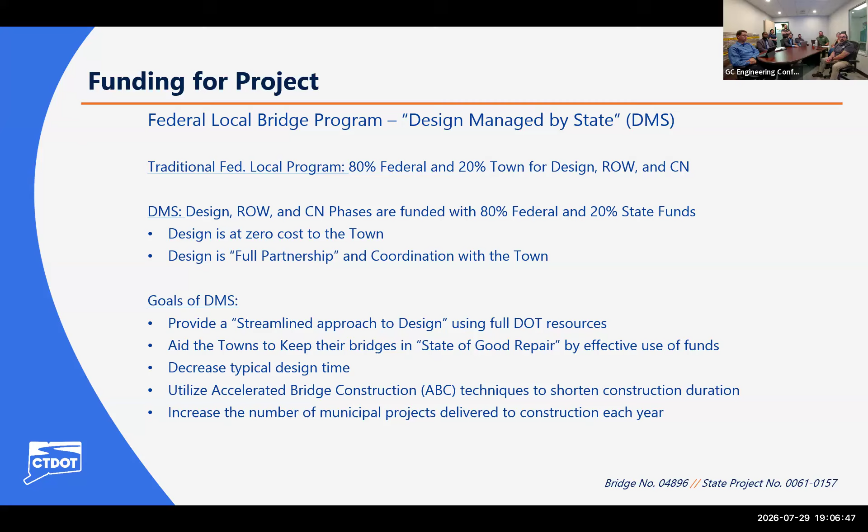Even though the department is undertaking the design on behalf of the town, it is still a full partnership with the town, and we coordinate at key project milestones such as this. The goals of the DMS program were to provide a streamlined approach to design using full DOT resources, to aid the towns to keep their bridges in a state of good repair by effectively using funds, decrease typical design time from 48 to 60 months down to 24 to 36 months. Where applicable, utilize accelerated bridge construction or ABC techniques to shorten construction duration and increase the number of municipal projects delivered to construction each year.

Representing CTDOT are Derek Lassard, Division Chief of Bridges, Greg Funk, Principal Engineer of Consultant Bridge Design. As I stated, I'm Mark Burns, Supervising Engineer and Consultant Bridge Design. Michelle Rain is the Project Engineer, and Malcolm Thomas is the Project Coordinator for the Office of Rights-of-Way. Representing GM2 Associates, who's CTDOT's Consultant Liaison, are Mike Brady, Project Manager, and Dan Carnine, Project Engineer.

I'll now turn it over to Stephen White, Town Engineer, for some opening remarks.

Thanks, Mark. As he mentioned, this is a design project fully funded by DOT. Just want to make that point. They are coordinating all the design phase and construction with the town, with my office, so we are making sure that the town's interests are best represented. I appreciate the DOT and all their work helping us get our bridges in better shape. We'll keep it short, turn it back over to the DOT and our designer from GM2. Great, thanks Stephen.

This is a quick slide showing various bridge components. The deck is also known as the driving surface, where vehicles, pedestrians, and bicycles use the bridge. Parapets act to prevent the traveling public from going through into roadside hazards. Supporting the deck is the superstructure, which in the case of this image is steel beams. Supporting the rest of the superstructure are the abutments, otherwise known as the substructure. Depending on the span length, there will be one or multiple piers. Wing walls will also be present to act for earth retention.

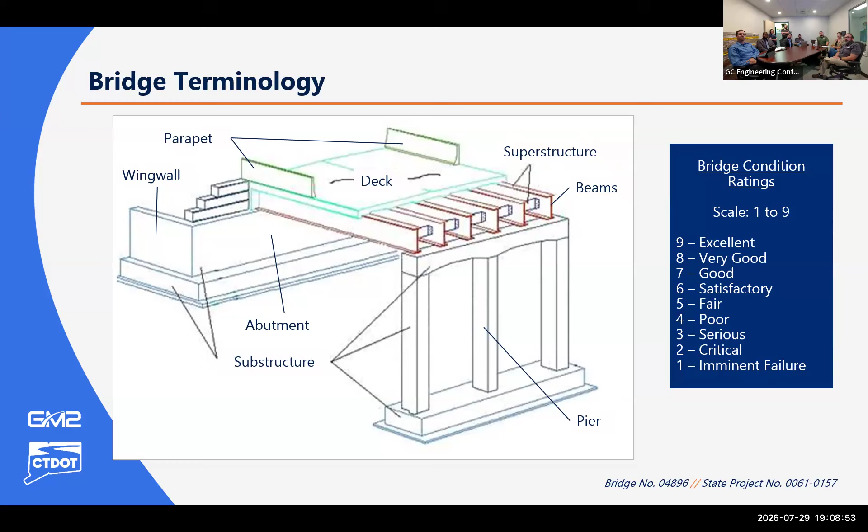Project 61-157 involves bridge 4896, which carries Willow Street over Willow Brook in the town of Hamden. The bridge is approximately 650 feet east of the intersection with Route 10, or Whitney Avenue. We're also nearby the Hamden Fish and Game Protective Association.

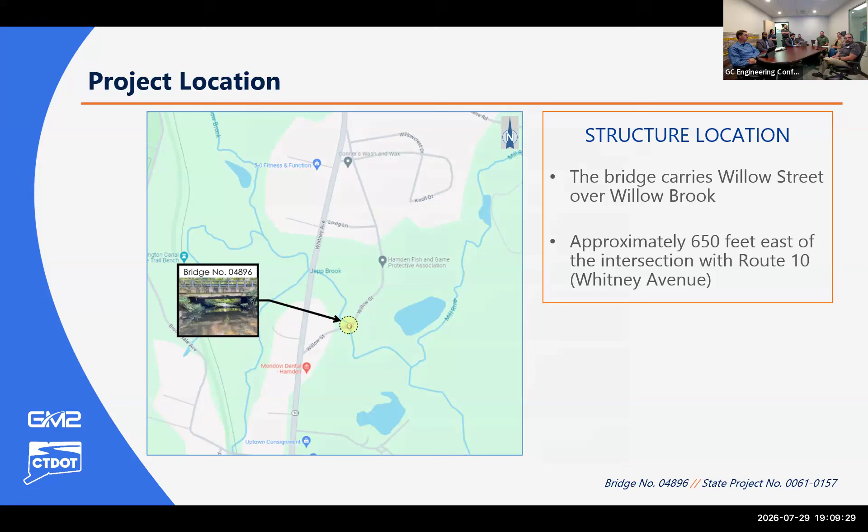This is an aerial view of the site showing the project is located on the fringes of a suburban area, but the area immediately around the bridge is mostly forested with a lot of wetland areas.

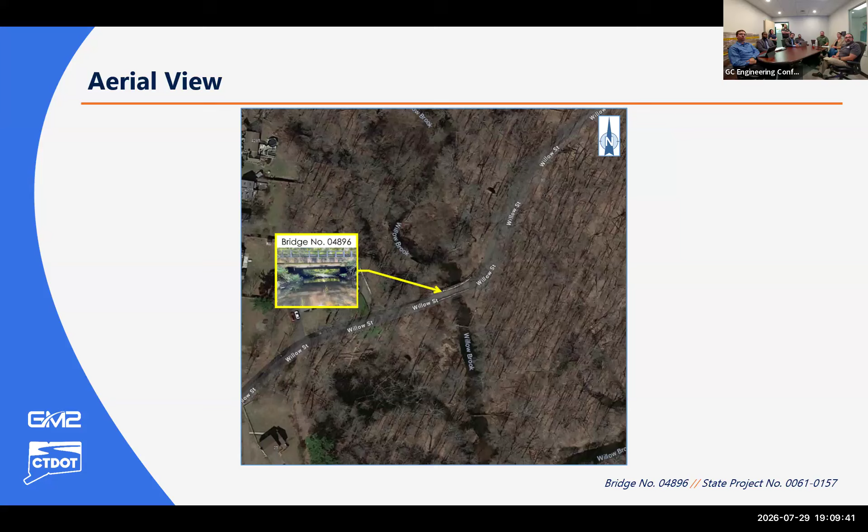The existing structure consists of concrete T-beams. That structure had an original curb-to-curb width of 18 feet. However, it's currently approximately 11 feet after the installation of barriers on the roadway. Bridge length measures at 26 feet, which is slightly undersized for the measured bankfull width of the brook, which is about 50 feet.

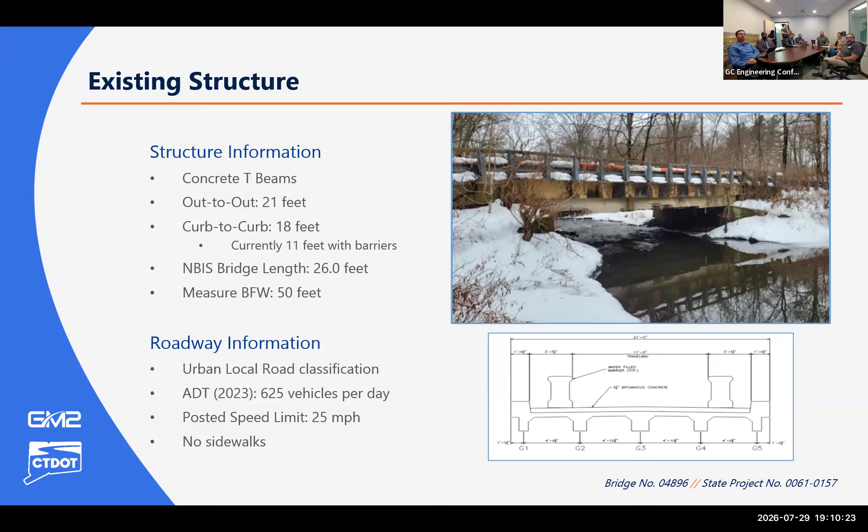The roadway is classified as an urban local road with a lower average daily traffic of about 625 vehicles per day, and there's a posted speed limit of 25 miles per hour. There are no existing sidewalks along the road.

The existing bridge is in poor to serious condition with an overall rating of 3. The shoulders have been closed with temporary barriers due to the deterioration in the outside beams. Those girders have hollow areas, including spalls and exposed and rusted rebar, and that exposed rebar does exhibit section loss and even severed through in a lot of locations. In addition to that, the abutments do exhibit some deterioration as well.

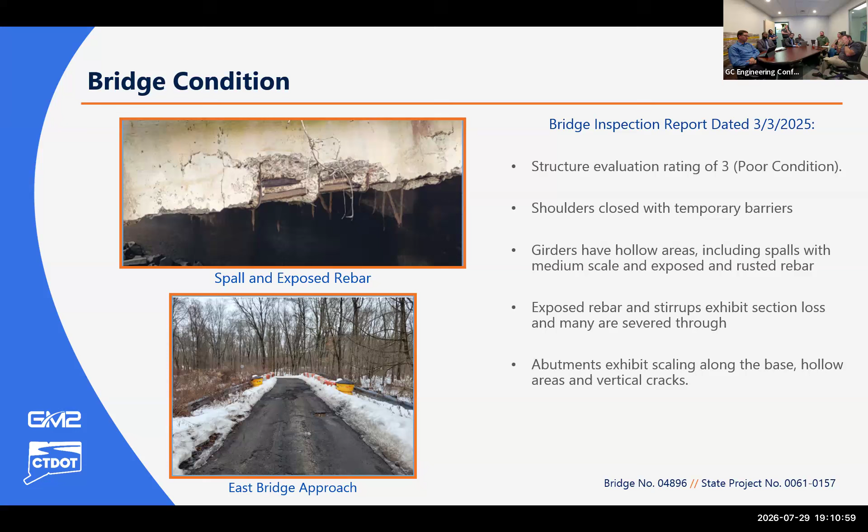Some additional bridge condition photos. The top left picture shows the northwest abutment corner and some of the deterioration there. The top right photo shows the typical deck underside, specifically in bay 1, and some of that deterioration on beam number 1. The bottom left picture shows the typical condition of the abutment, and the bottom right photo shows some of the debris in the upstream channel.

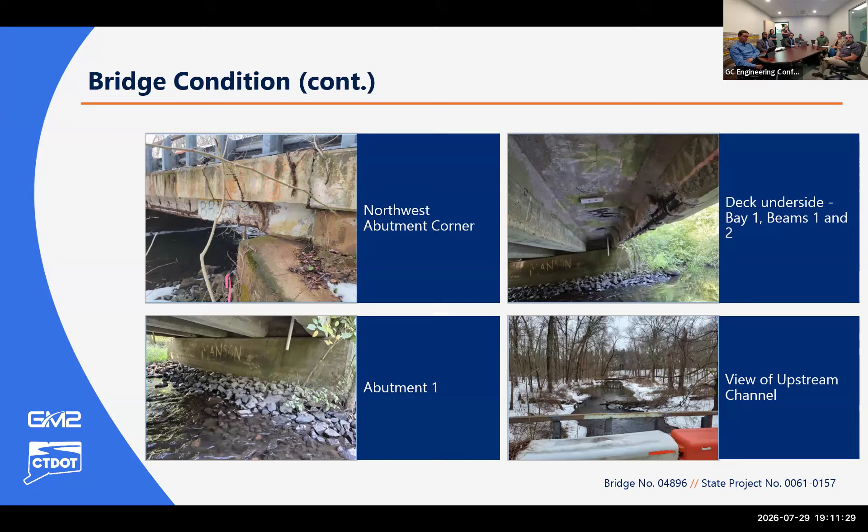Taking the existing conditions into consideration, we developed a purpose and need for the project, which is to provide a resilient replacement structure that addresses the poor structure condition and substandard curb-to-curb width. Again, the existing or original curb-to-curb width of 18 feet would be considered substandard, but since those barriers have been placed on the roadway, it just made that condition worse with the 11-foot lane that's out there today.

We also mentioned that the girders do have some serious deterioration that needs to be addressed. We also want to note that the existing bridge is posted for live load restriction, which means heavier vehicles are already restricted from using the bridge.

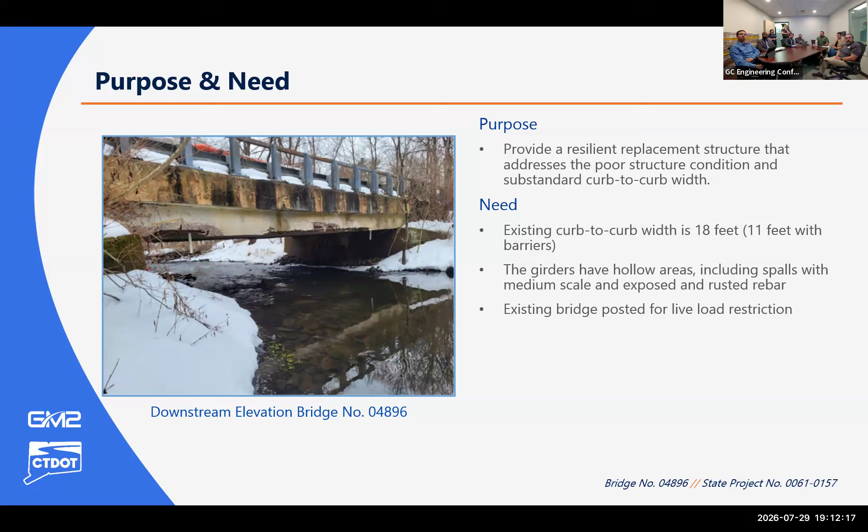So this project will involve a full bridge replacement. The new bridge will use pre-stressed AASHTO concrete deck units and a 6-inch minimum concrete slab. The new structure span length will be increased to 46 feet 6 inches, and the new bridge will be widened to have a curb-to-curb width of 25 feet 3 inches. That curb-to-curb width will accommodate 2 travel lanes, 1 in each direction.

The structure will be supported by integral concrete abutments on deep pile foundations. Along the top of the bridge, we will have open metal bridge rail that terminates into reinforced concrete end blocks. And then at both bridge approaches, we will install new metal beam guide rail and bridge attachments that meet the latest safety standards. In addition to that, all exposed bridge elements will be treated with a simulated stone masonry appearance.

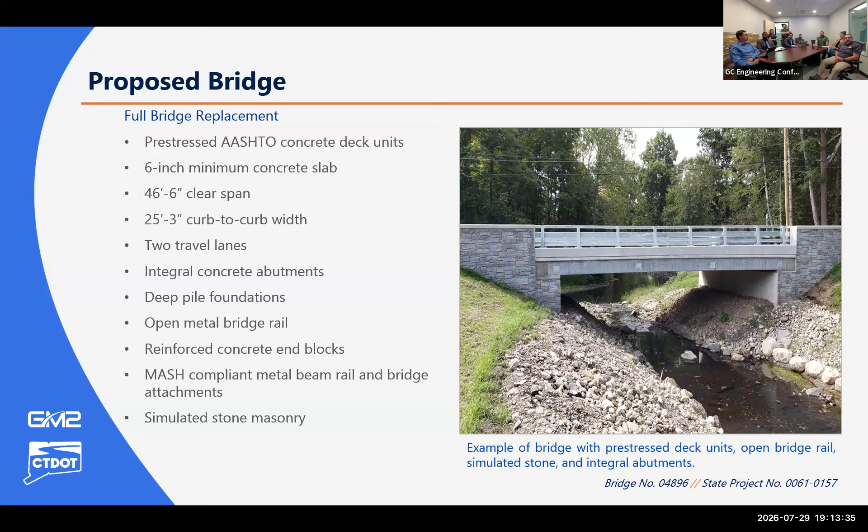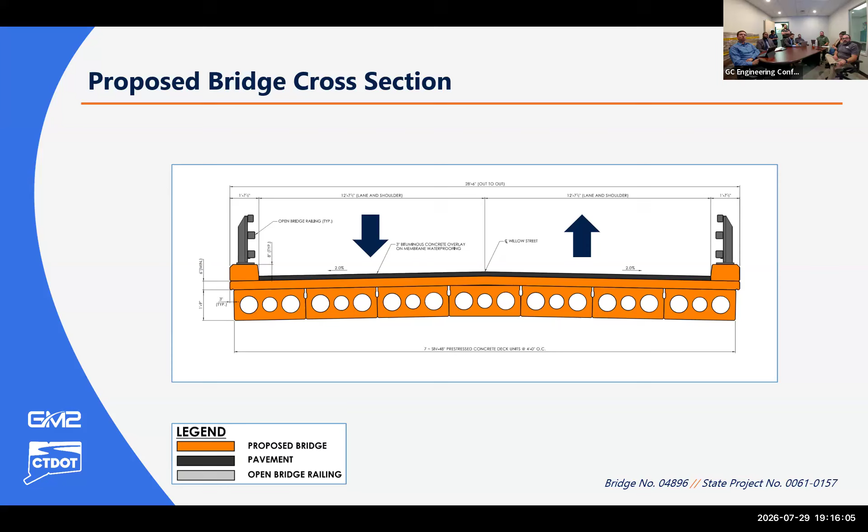Construction will use 1 stage of water handling in order to remove the existing structure and build the proposed bridge and channel. During construction, we will maintain a minimum approximately 16-foot temporary channel width to maintain water flows and unrestricted fish passage throughout construction.

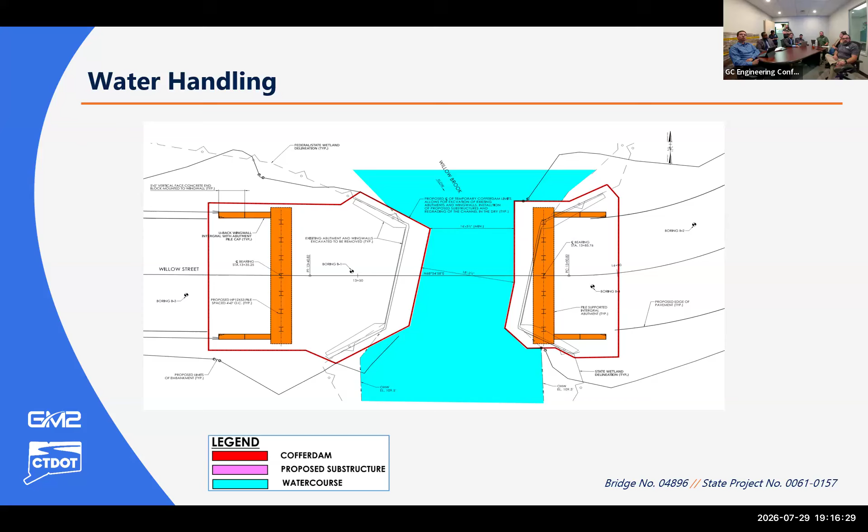Construction will require a full roadway closure at the bridge, and traffic will be handled with a detour. That detour is approximately 0.7 miles long and will include Lovig Lane and Whitney Avenue, or Route 10. The duration of the detour is about 6 to 8 months.

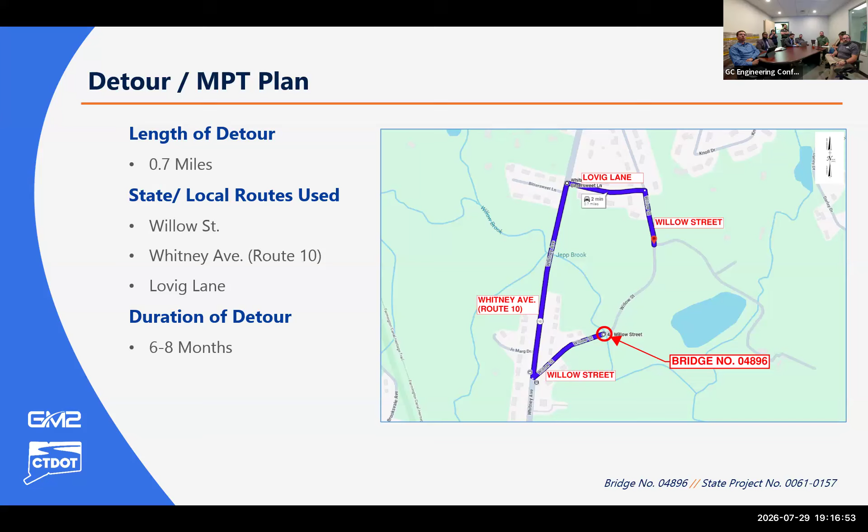We will get all the necessary environmental permits for the project at the federal, state, and local level. At this time, we do anticipate a United States Army Corps of Engineers PCN permit, a flood management certification through the state of Connecticut, as well as the town of Hamden and the Wetlands Water Course permit.

In addition to that, we are coordinating with Connecticut DEEP. The DEEP Natural Diversity Database Unit, or NDDB, has reviewed the project and confirmed there's no anticipated state listed or protected species at the project site.

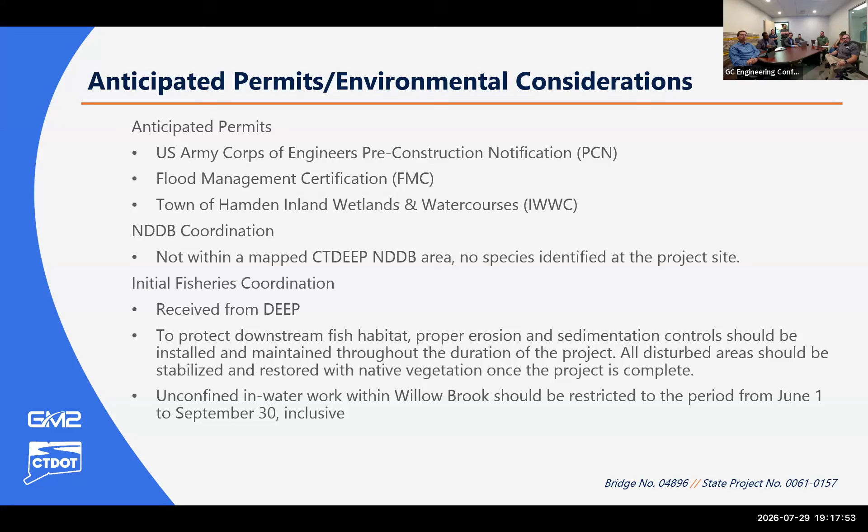We've also been coordinating with the DEEP Fisheries Unit in order to protect or improve the fishery resources at the project site. We've already received some comments from them, including using proper erosion and sedimentation control during construction, restoring all disturbed areas, and restricting unconfined in-water work to the allowable periods from June 1st to September 30th.

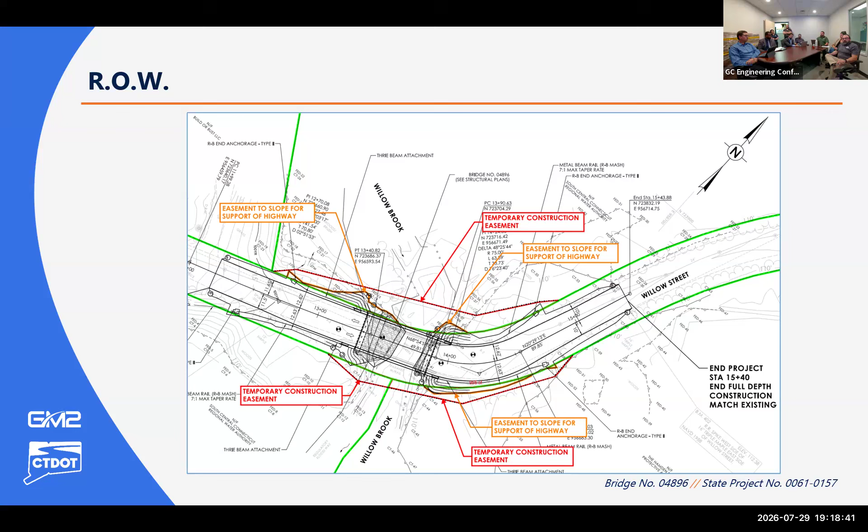At this time, I'm going to hand it over to Malcolm from the Division of Rights to talk a little bit more about the right-of-way process. Thank you, Dan. As mentioned, I'm Malcolm Thomas, an assistant project coordinator for the department's rights-of-way unit.

Our unit is responsible for acquiring all property and property rights for transportation projects throughout the state. We acquire all property under 13A 73 and 13A 98E, as well as the Uniform Act. The state will only acquire property and property rights that are deemed necessary for the project.

Impacted property owners will receive a formal letter of intent to acquire and a property map, which will depict the acquisition that the state will need for this project. After that letter is sent out, our department will put together an offer outlining the state's offer and what's going to be acquired from the property owner for the project.

The property owner will have roughly 30 days to consider the state's offer and go into negotiations. If negotiations can't be reached in that time frame, the state will exercise its power of eminent domain, filing a notice of condemnation with the Superior Court, and the deposit for the state's offer will be deposited in the courts during that period to keep on pace with the schedule to meet project deadlines.

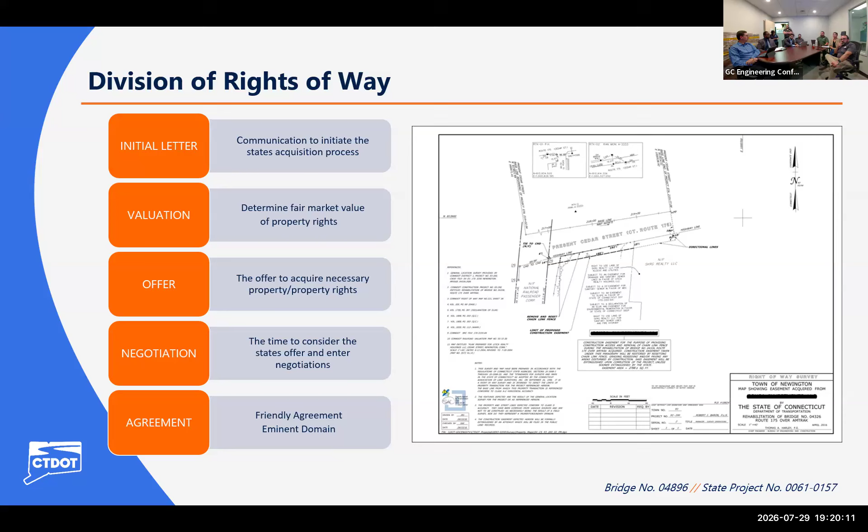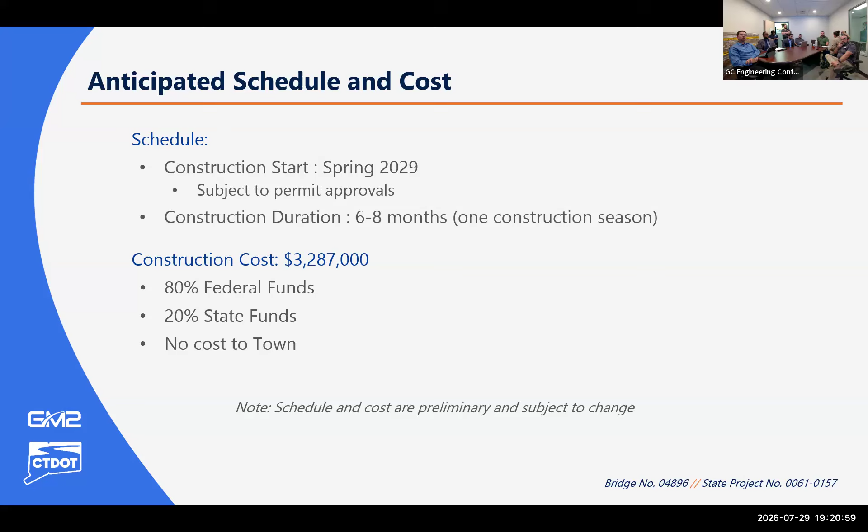That concludes our formal presentation for the evening on the project. We'll now get into a question and answer session.

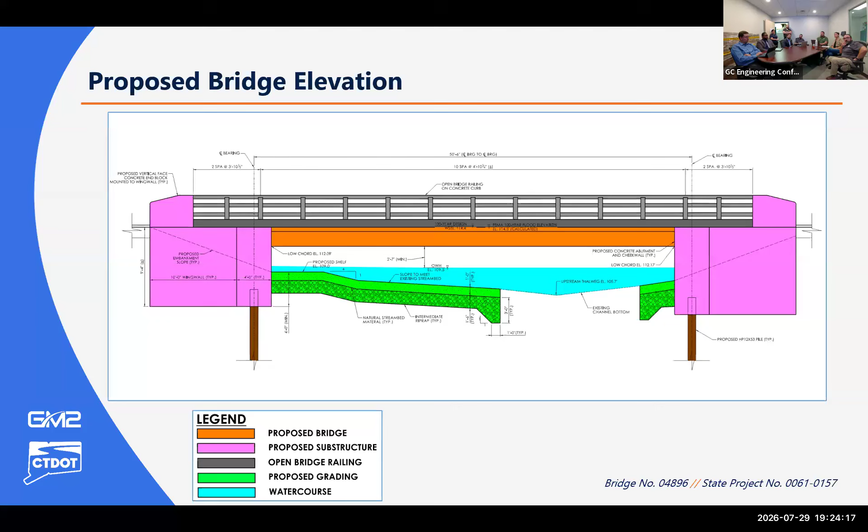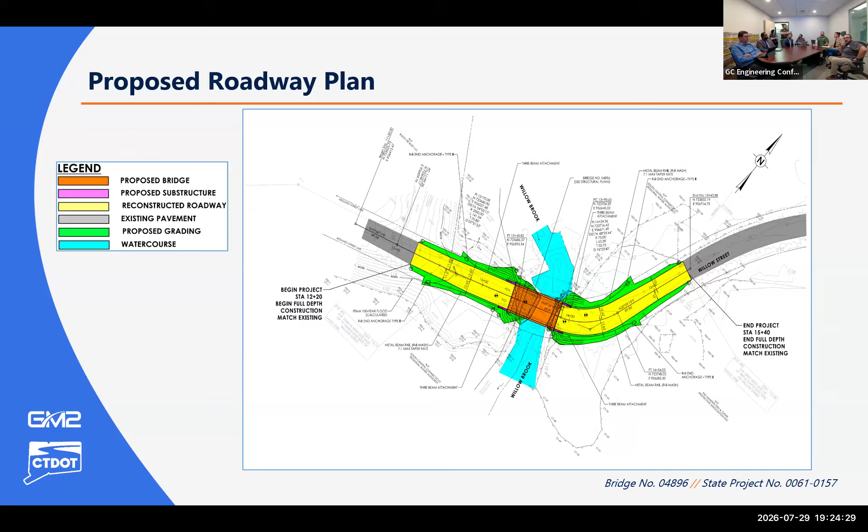I think we're planning on design being done in '29. Yes, so it'll probably be right after this one. Okay, thank you.